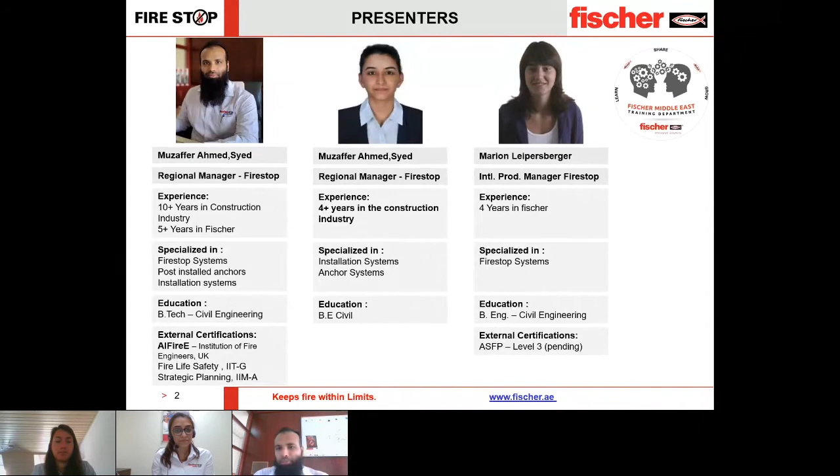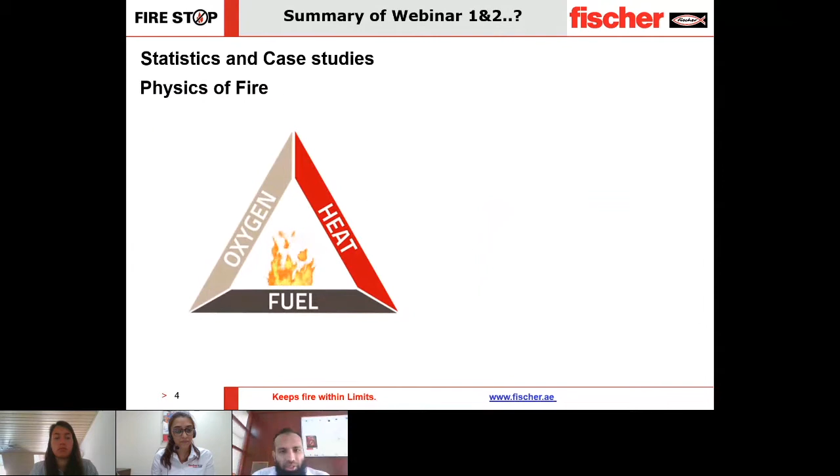Just to recap, in the first installment of this Firestop series, we had discussed some case studies concluding the importance of taking a balanced approach to fire protection, which should include the active as well as passive fire systems. And to understand better, we saw how fire behaves and understood the different stages of fire progression. Then we saw Firestop as part of the requirement within the passive fire protection systems and the code requirements of the same.

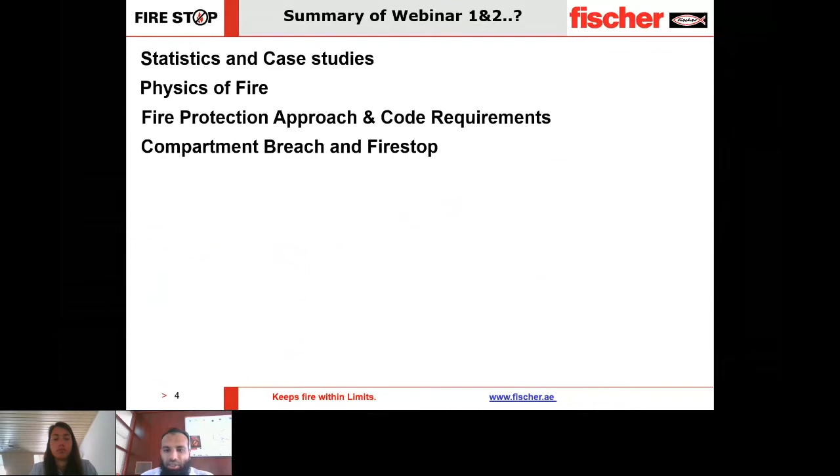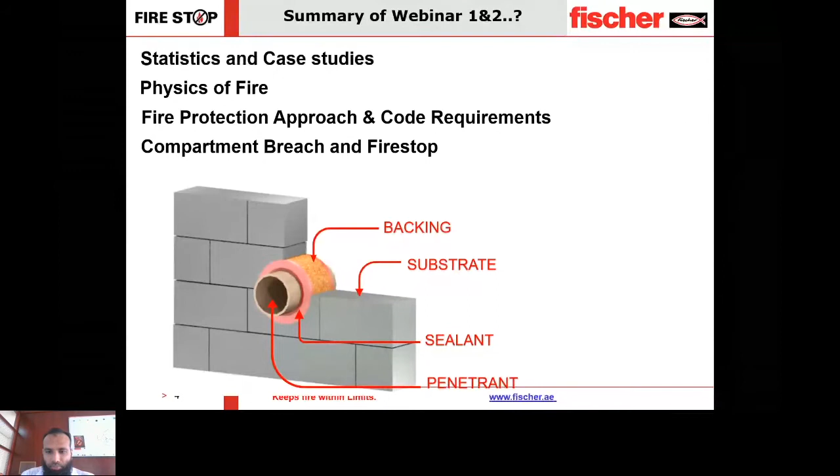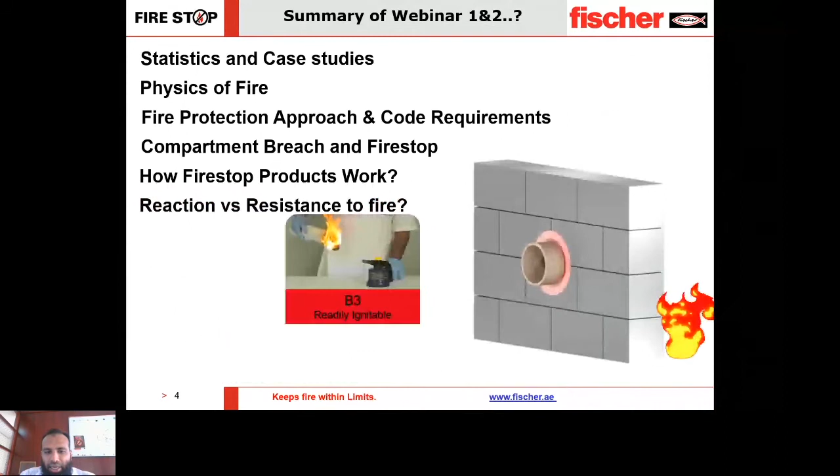In the second episode, we talked about the system approach for fire stopping, where all the elements of the system are to be considered while looking for a proper solution. We also discussed the different technologies behind the Firestop products, and finally, the standards for testing and certification were discussed in detail, including the EJ, or engineering judgment, discussions that we had.

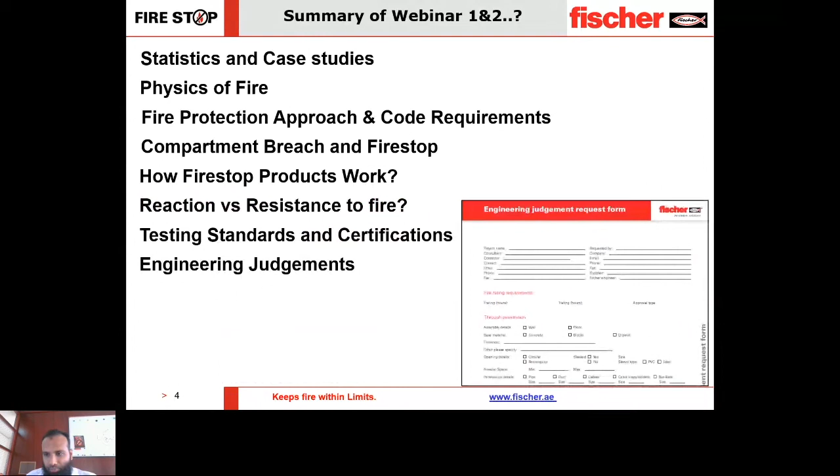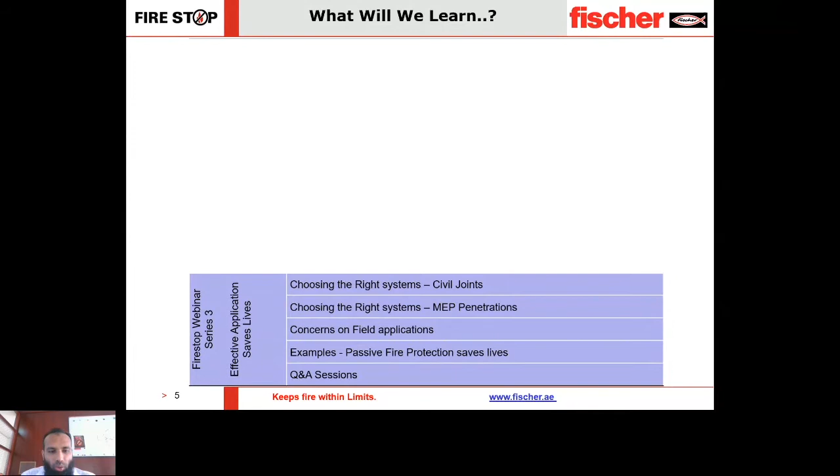Let us continue with this presentation today, which is the final in our series, and we will be looking into the right systems or the solutions that we as fischer would offer in the civil joints as well as MEP penetrations. Then we would discuss some concerns regarding applications, and finally we would wrap up the session by showing some examples of how passive fire protection worked, and a question and answer session will be at the end.

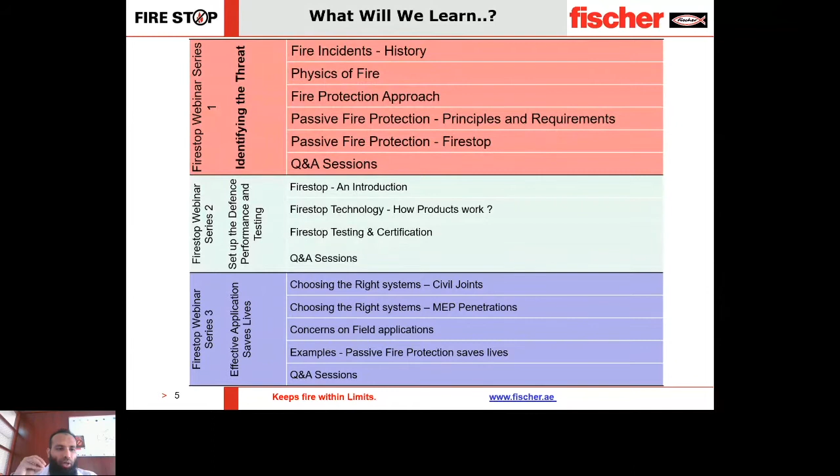So that we had covered the entire range and tried to do justice by giving as much information as possible for Firestop. In the last episode, we had shown that we have a range of products which are divided into 4 main categories: the sealants, sprays and coatings, wraps and collars, and some special products.

Now, many times people would have this question: why are there so many different products, and why can't there be one product as a solution for entire fire stopping in a project? Now, we have seen that there are several types of breaches that are caused in a fire rated barrier. Each of these breaches has its own different set of parameters. So you have different types of penetrants that are going through, and hence to address all of these solutions, all of these fire stopping requirements, we would need a range of solutions which would be addressing individual applications.

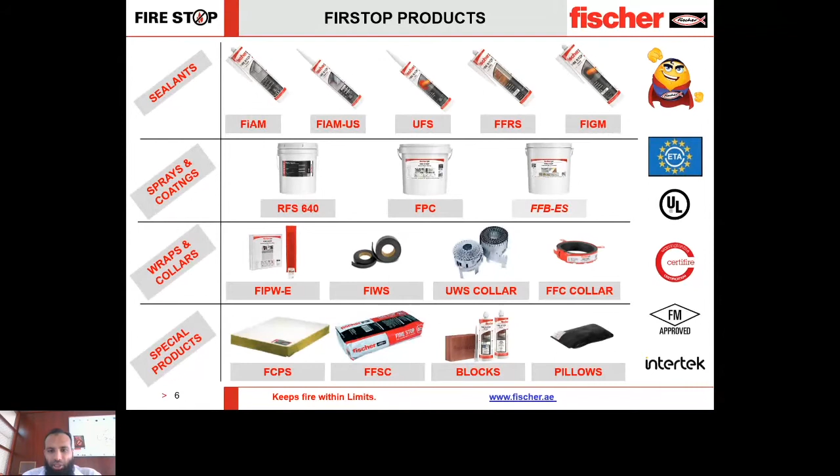So we would look at the applications that we face in day-to-day fire stopping, and we have divided that for simple understanding into civil joints as well as MEP services. When we talk about civil joints, we are talking about the joints between fire-rated members, fire-rated barriers, or sometimes, as in case of curtain wall, a fire-rated barrier and a non-fire-rated facade system.

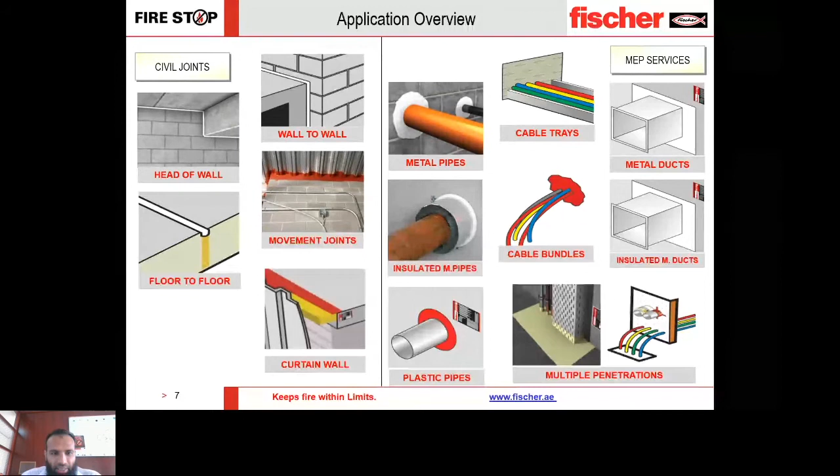And when we talk about MEP services, we are talking about all the different types of penetrations that would be going through. And to discuss about civil joints, I would like to invite Ansel. Ansel, can you take us forward in our quest for finding the right solutions for fire stopping in civil applications?

Sure. Thank you, Muzaffar. So coming to the first application that we generally come across in the field would be the head of wall joint. So this is a joint between a fire rated wall as well as a fire rated floor. Now we need to consider a few parameters while choosing the right system for it.

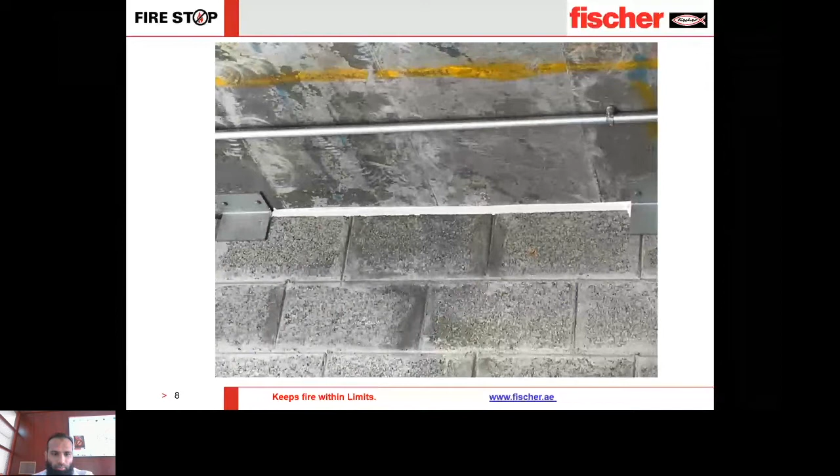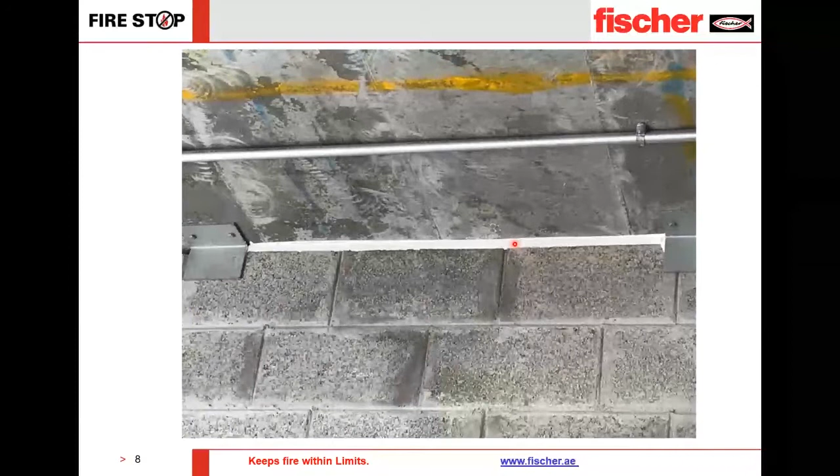So the conditions would be the aesthetics, like is your joint exposed? So you will need a material that would be compliant with the painting requirements as well, and also meeting the color requirements as per the architectural plan. Similarly, you would also need to take care that there will be some structural movement within this joint system, so it needs to be capable of withstanding the movement, and mostly you need to take care of the aesthetics or the acoustics of the joint.

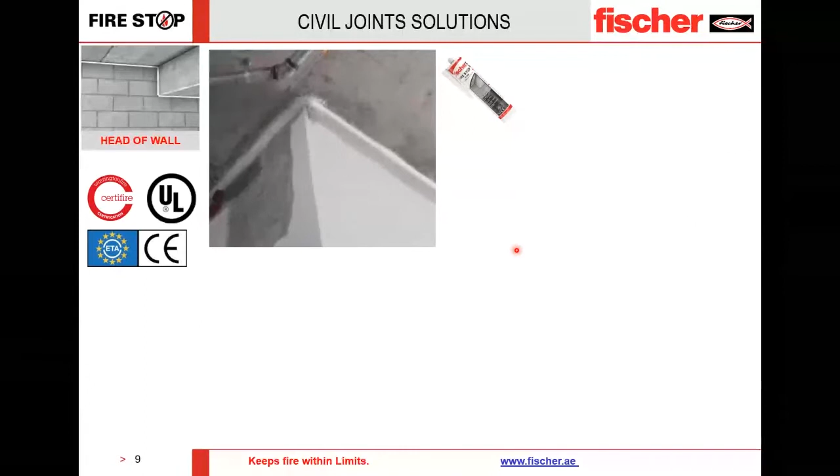The most common solution we would propose would be our acrylic-based sealant called FIAM, fischer Intumescent Acoustic Mastic. The name itself says that it takes care of the acoustics and it's an intumescent material. As it is an acrylic-based material, you can paint over it, and it is available in white.

You can apply the sealant with a thickness of 10 mm over a PE backing rod, or with a thickness of 5 mm over a stone wool backing. Apart from this, the movement is tested for up to 25%, and that would be enough for a normal head of wall joint. Similarly, we have another solution called the rapid fire seal, or the RFS 640, which is red in color.

This would be suitable for areas which are having a false ceiling. It has quite a movement capability of up to 50%, and this would be applied like a spray.

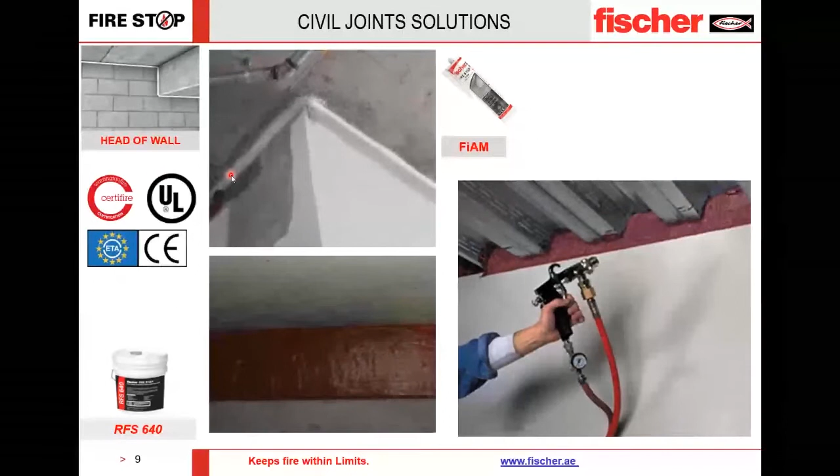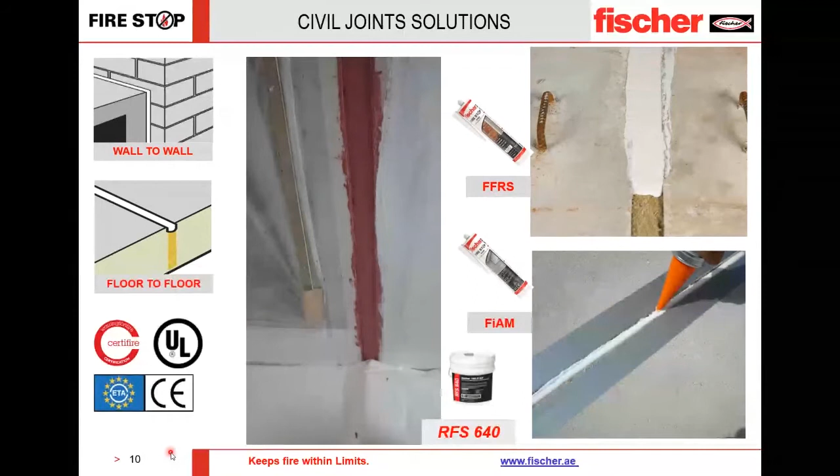Building occupants will not be able to escape very easily. Also, it is known that apart from flames, smoke and toxic gases are the most hazardous of all. So the joint must be properly sealed.

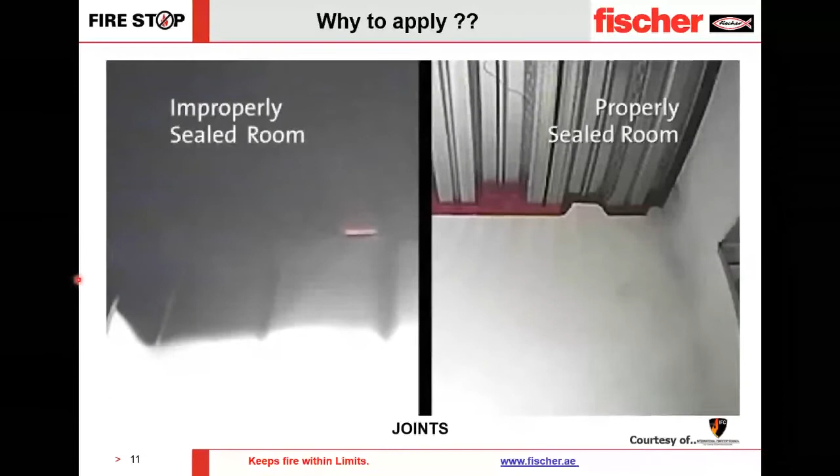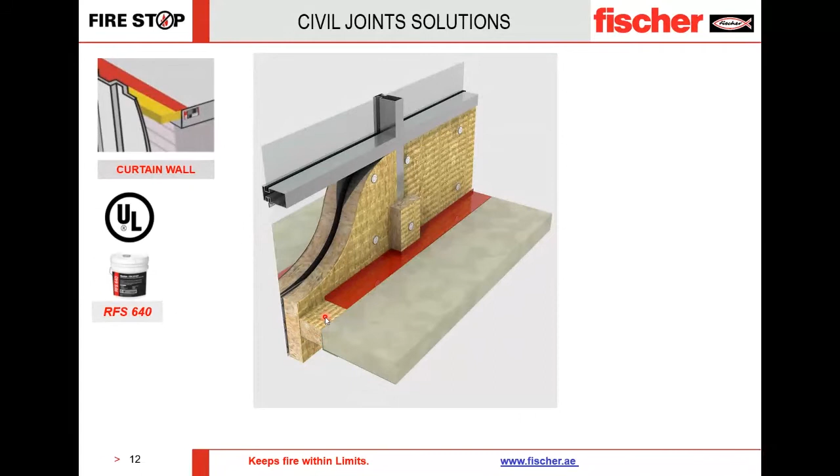Coming to curtain wall application, the main criteria here is the joint which is formed between a fire and a non-fire rated facade system would be approximately up to 200 mm. The solution that we would provide in this area or the gap should have sufficient insulation so that the glass does not break in a fire incident, and then close the gap in an event of flame.

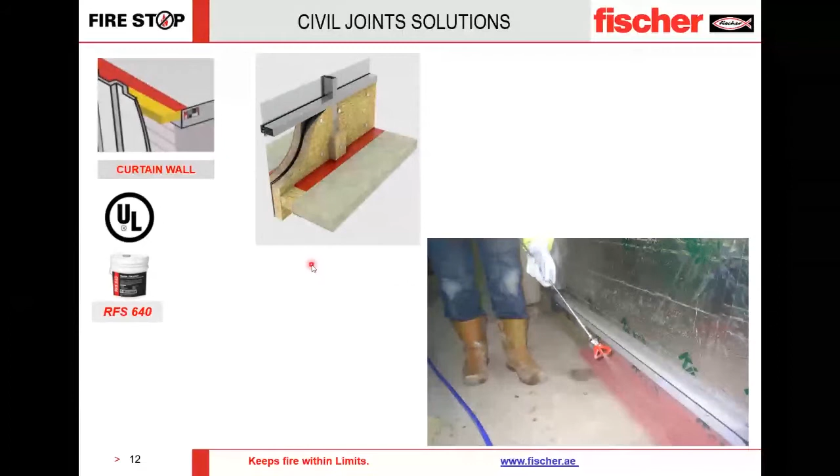The proposed product would be the RFS 640 in this case, where there is a mineral wool backing and then a spray sealant over it. The thickness of the sealing required to reach a fire rating of 2 hours is 1.6 mm thick. When it dries, it would reduce the thickness to 0.6 mm, and this is capable of taking a movement of 5%.

You can also use another product, which is the FFB-ES, but the thickness is slightly more than 2 mm. We also have a dry type of system where you can compress the material, fix it using the brackets, and that's all. This material would be predominantly used even for glass facades as well as ventilated facades.

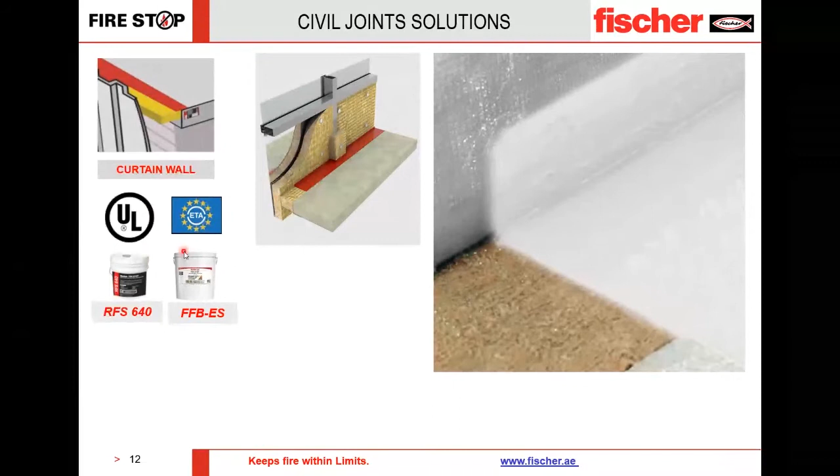This brings us to our second category, that would be the rain screen facades or the cavity or ventilated facades.

Now, rain screen system would be constructed with either a stone material or an aluminum composite panel sheet. Also, quite often we see that ACP sheets are used, and these sheets provide an easy path for flames to pass and spread across the external facade.

Now, these ventilated gaps are a requirement to have for a functional purpose. However, during the fire, this does not behave in a positive manner. So we need some product that would provide the ventilation during the lifespan of the building. When exposed to the event of a fire, it closes the gap.

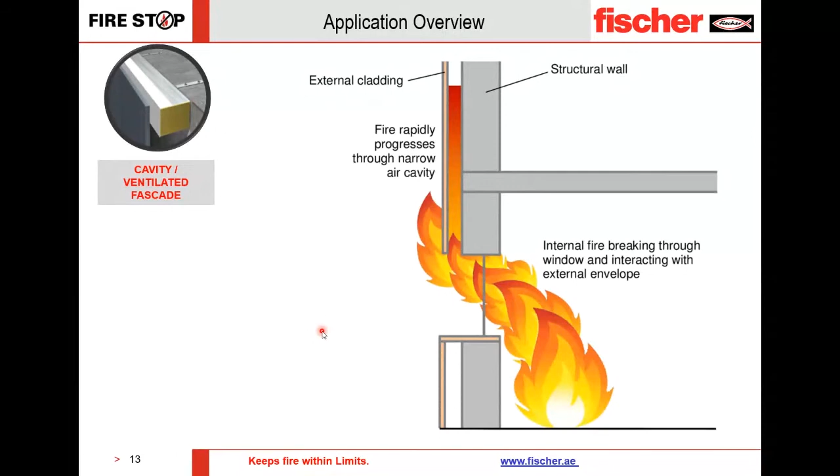So we have a product called the Ventistop, which has an intumescent strip which would allow the ventilated gap of 25 mm, and then when exposed to a fire, it expands and closes the gap behind the facade itself. We have an additional product, that is the FCFCL, which is placed vertically.

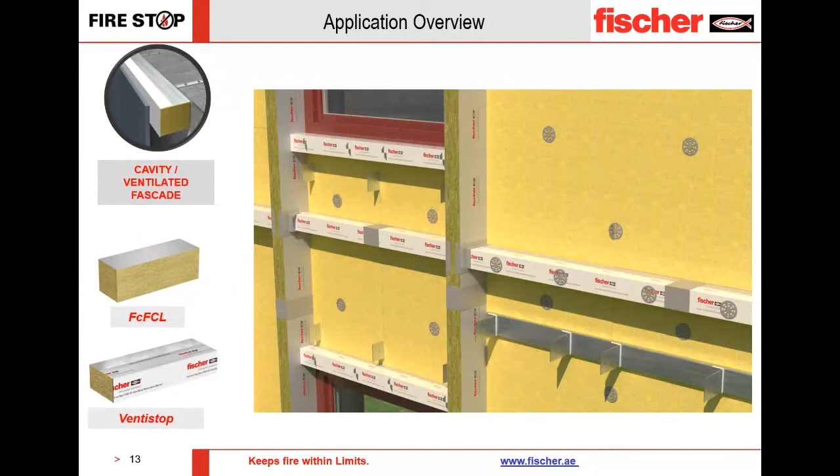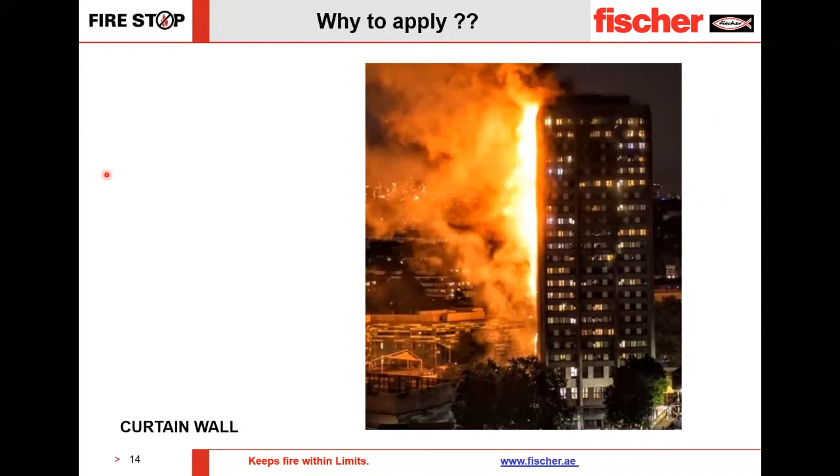Civil joint applications are really, really important. It is very important to note that civil joints are continuous joints, and a proper solution there would ensure safety of the building occupants. Now, moving on from civil joints, we come to MEP services.

In MEP services, we have several penetrations. The first common penetration that we look at are the pipes. And within the pipes class, we have the metallic pipes. So, Marion, can you take us forward in the metallic pipe solutions? What kind of metal pipes do we see on the usual projects?

Sure, Mustafa. Thank you very much for the introduction. So first of all, for fire stopping MEP services, we always need to take a close look on what exact type of penetrations are going through an opening in a floor or wall. So for metallic pipes, on the construction site, you will find a huge variety, but metallic pipes are mainly made out of steel or copper.

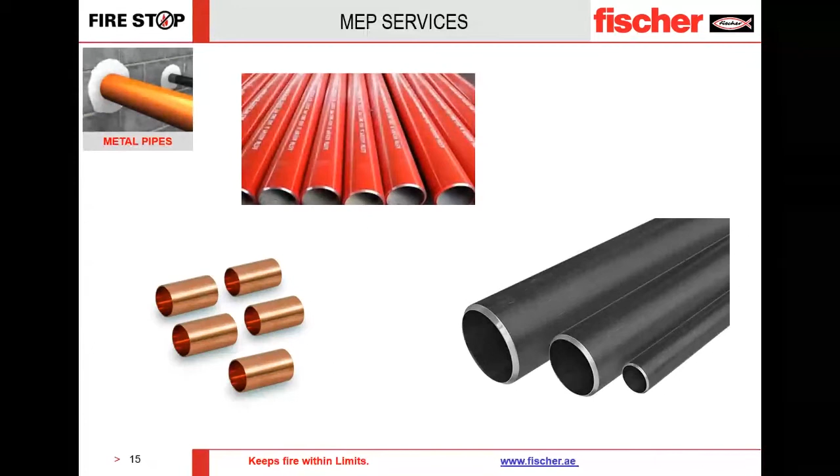For metallic pipes, Fischer can offer a variety of sealants with different approvals. The two most popular ones that we can offer are the Fischer EMUS and the Fischer RFS Rapid Fire Seal. Both of them are tested to the UL testing standards and have multiple UL listed systems. The application for metallic pipes is usually very simple, as the advantage of a metallic pipe is that in a fire they stay integral and will not decompose. Because of that, we only need to close down the gap between the pipe and the opening, and the application is finished.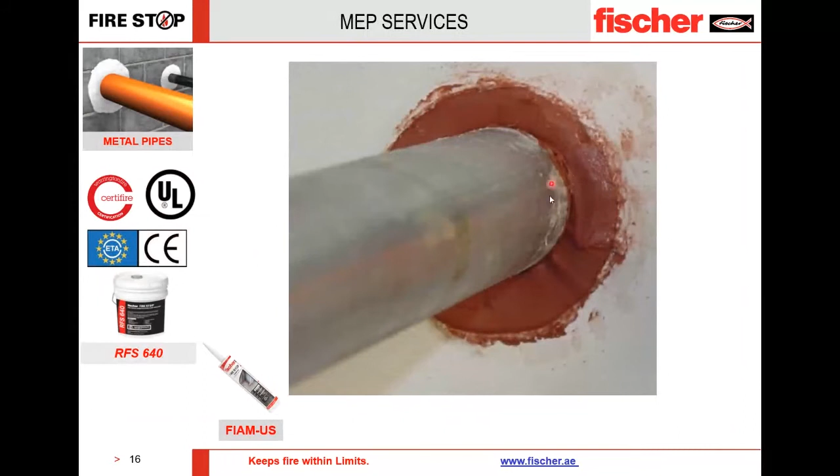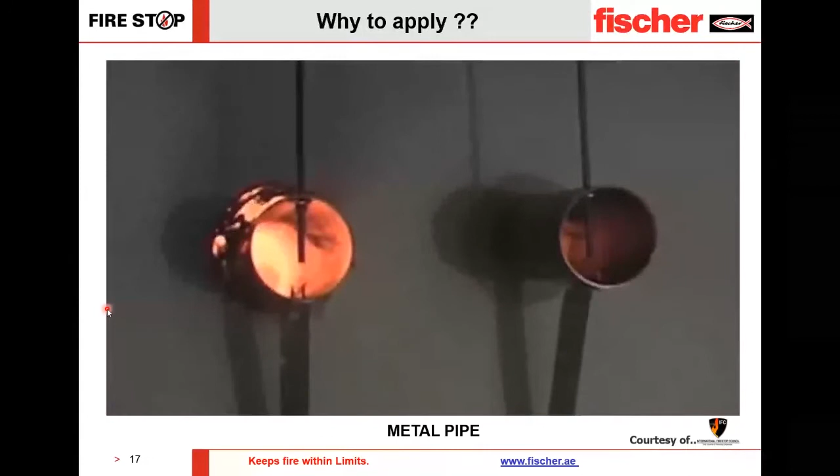We prepared also here a short video which shows the impact a proper Firestop sealant is doing around a metallic pipe compared to just using the standard foam which you often find on construction sites. And from the video, you can imagine on the left pipe, which is not sealed properly, how quickly the heat, flames, and the fire itself will spread from one part of the building to another, especially in comparison to the proper fire protection done on the right pipe.

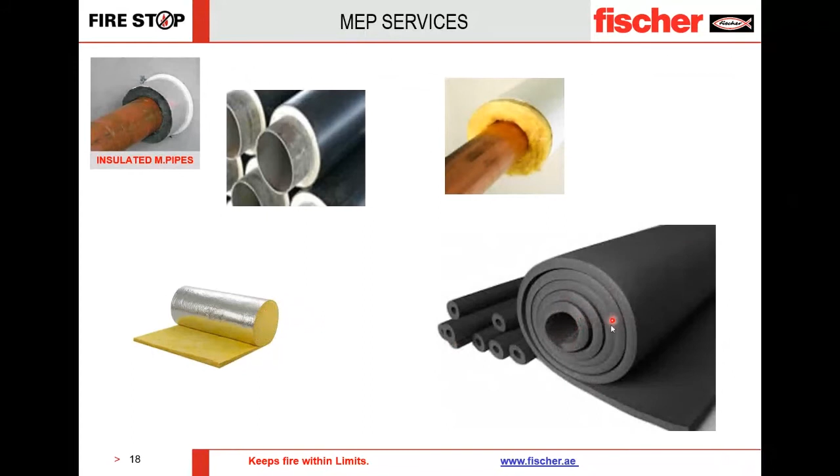Now let's move on to another type of pipe we often find on construction sites, which are the insulated pipes. The choice of the right product here strongly depends on the insulation material which is used. Mainly, we can differentiate between three types of insulation: stone wool, glass wool, or a rubber type insulation, as seen on the right bottom, for example like the Armaflex insulation.

As an example, if a pipe is insulated with stone wool, this actually helps us under fire conditions, as stone wool insulates the pipe and stays integral throughout the fire, making it way more difficult for the heat to transfer through a wall or floor. On the other hand, if you have a rubber insulation, it will melt very quickly in a fire, leaving a bigger opening for the fire and flames to pass through. In this case, we need to use a different type of sealant.

So the Fischer solutions for insulated pipes are, for example, the FIAM-US, which can be used perfectly around stone wool insulation, or the UFS, the Universal Fire Stopping Sealant. For the rubber insulation, we can offer a very good special sealant, the FIGM, the Fischer Intumescent Graphite Mastic. It has a UL-EU approval, and the graphite contained in the sealant makes it expand very big when it is exposed to heat.

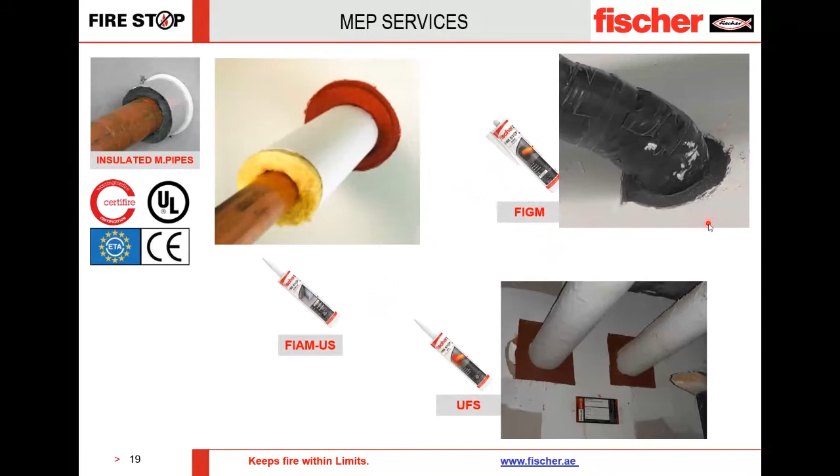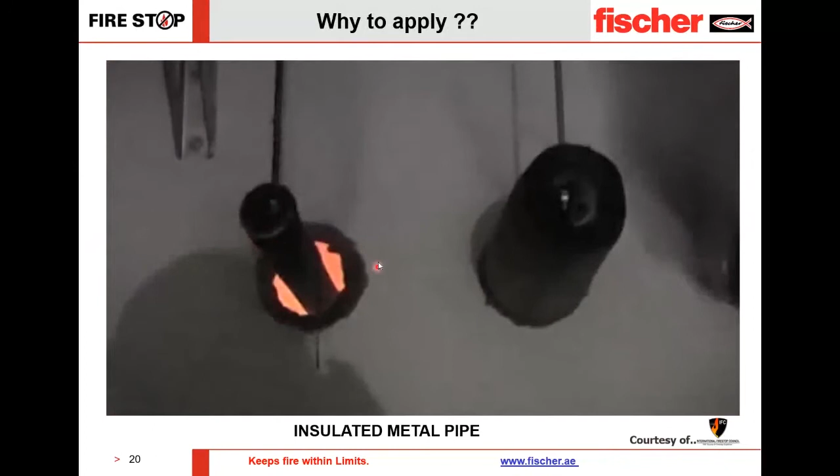On the next slide, there is again a video which shows on the left pipe the use of a B1 foam, which you usually find on construction sites, and on the right side a proper fire stopping, which could be, for example, the FIGM solution. What is important to mention here is that the insulation is completely the same, and you can see that on the left pipe the insulation is completely melted away. There's a huge gap where fire can pass through, and the sealant used on the left pipe is not doing any good to keep the fire away.

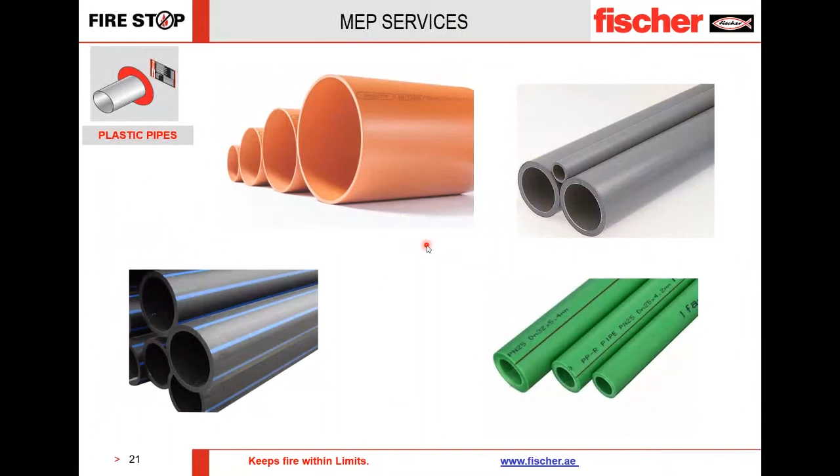The last type of pipe I want to present to you are the plastic pipes, which we also very often find in buildings, and they can be made out of, for example, PVC, PP, or PE. So what is the difficulty with plastic pipes? In the event of a fire, the pipes will burn or melt away, so we need to use a product which is able to fill and close this resulting opening.

For plastic pipes, Fischer can offer 3 different types of products: first, a variety of sealants. If the pipe diameter is not that big, we could use the UFS and the FIAM-US, just in comparison to the insulated pipes. If the pipe diameter is a little bit bigger, or we have a different type of pipe, we can also use the FIGM with the UL/EU approval.

On the other hand, we can also offer wrap strips or fire collars, which in the end basically all do the same thing. It just depends on the customer's needs whether they want a visible or an invisible fire stop solution.

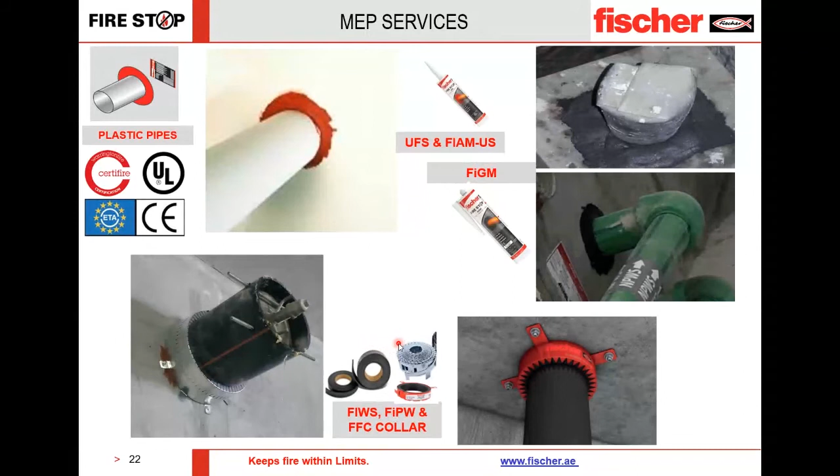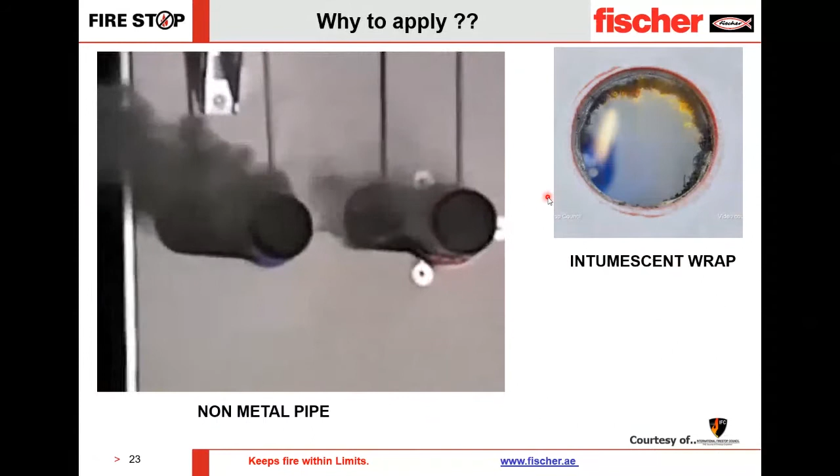So the next video shows the significant difference between a proper and an improper fire stop solution. The pipe on the right has been fire stopped correctly using a fire collar, as you can see in the video. The other pipe was just sealed using a standard sealant. And yeah, I mean, you can see it pretty easily.

There's fire and smoke coming through. The opening is completely open. The pipe is completely melted away. There's nothing left of it.

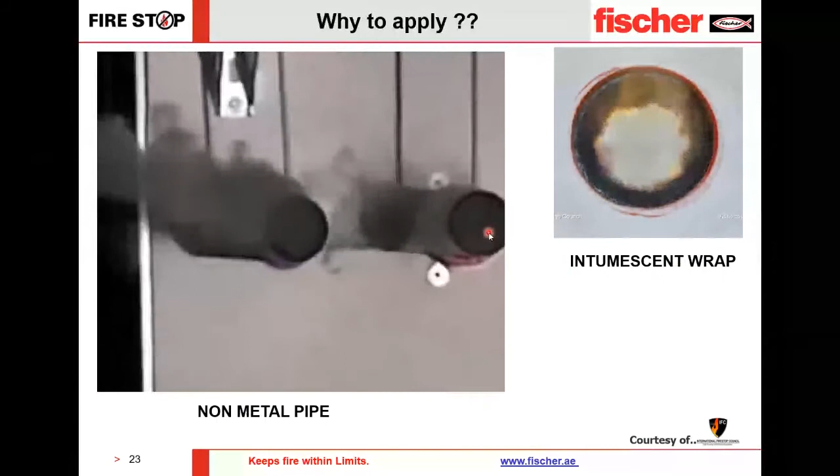On the other hand, when we use the fire collar, there's just a little bit of smoke coming out of the opening, but the pipe still stays the way it is.

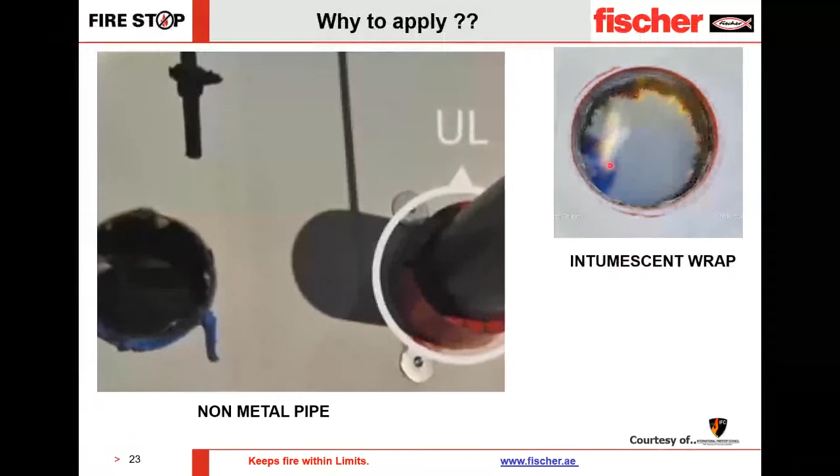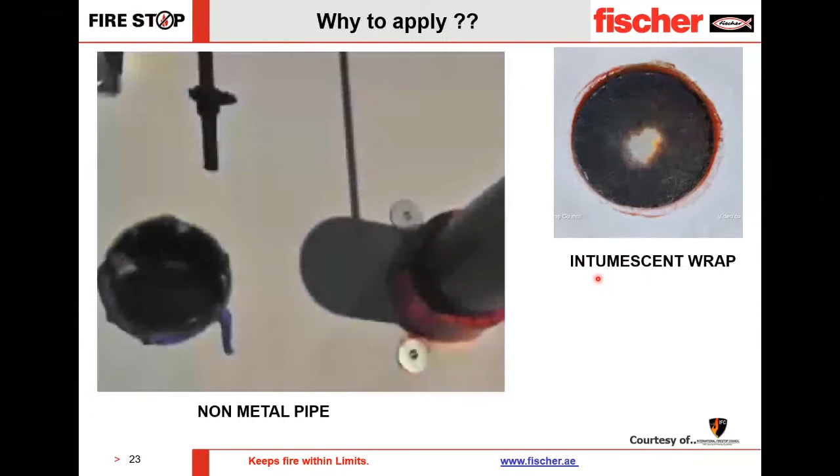The video on the right shows how a wrap strip works. The strip contains this graphite material, which expands a lot when exposed to heat, which then crushes the slowly melting pipe and completely closes down the opening.

All right, so far for the pipes. But in a building, we not only need pipes, for example, for the water supply, we of course also want to have electricity. So now let's take a look at the electrical applications.

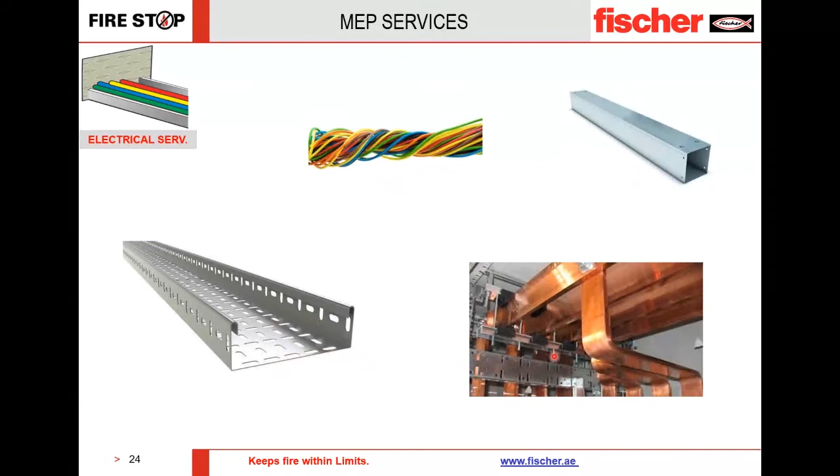In a building, we find a lot of single or bunched cables, cable trays or trunkings, or even busways. I quickly would like to show you how we can cope with these different electrical applications, starting with the cable bundles.

Cables are mostly structured with metallic lines on the inside and a plastic jacketing on the outside, so the product we use for fire stopping these cables needs to be able to cope with both types of materials. Perfect for these situations, again, are our two sealants, FIAM-US and UFS.

For cable applications, we can also offer a special kind of product, the Fischer FBS foam barrier system, which has a UL/US and a UL/EU approval. This system comes in Firestop blocks and a Firestop foam, and it's perfectly used if it's necessary during the lifetime of a building to add additional cables, as these can just be pushed through the application, and it's still an approved solution.

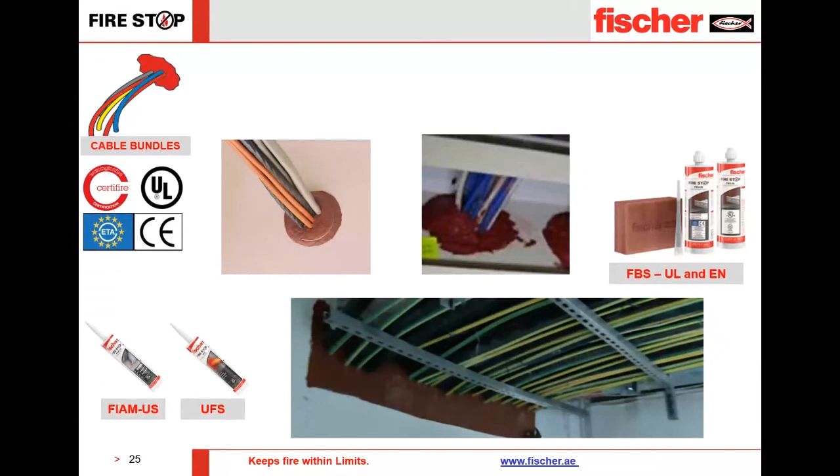For cable trays, on the next slide, we have a little bit different products, as mostly the openings for cable trays are a little bit bigger, since the cable trays are bigger, and there's also more cables running through the opening.

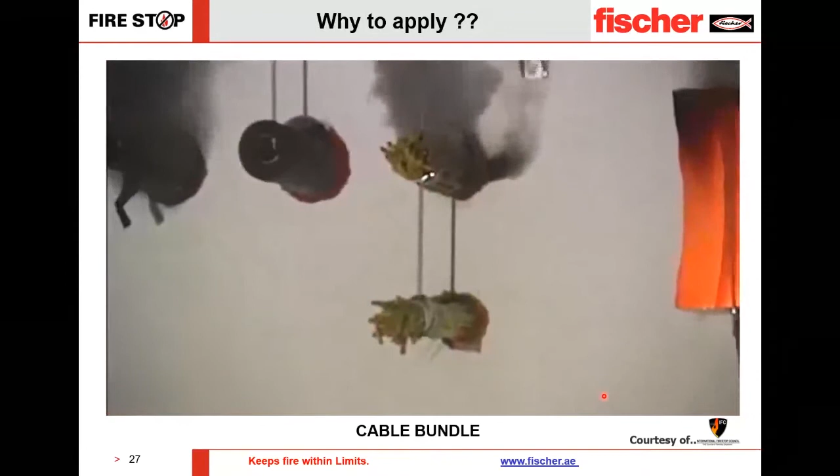Again, we have prepared a video which shows on top cables which have not been firestopped correctly. You can see the jacketing of the cable melts away, and there's a lot of smoke coming out of the opening. On the bottom, firestopping has been done correctly using a sealant which has been tested to the according standard, and there's almost no smoke coming through, so the passage of fire, smoke, flames, and heat is prevented very well.

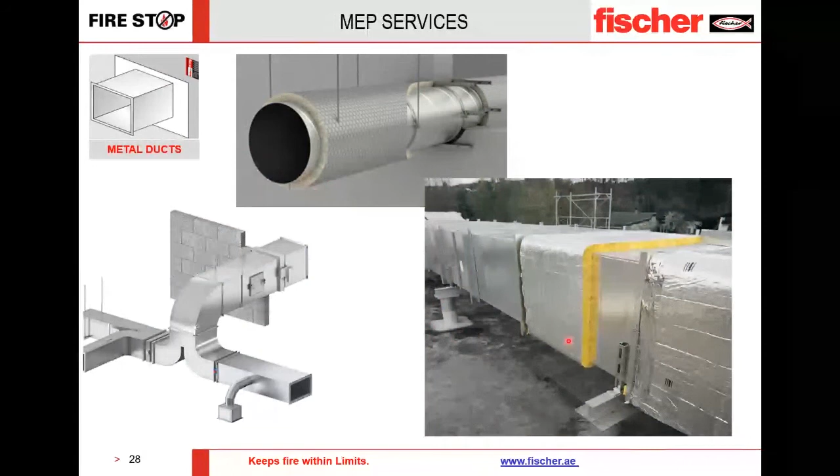Another type of penetrant we regularly find in buildings are metallic ducts for air conditioning or heating purposes. They sometimes have insulation, or are just metallic. Depending on the type of duct and the size of the opening, we can use the sealants UFS or FIAM-US to close down the gap between the duct and the wall or floor. In some cases, if the duct is insulated with a rubber type insulation, we need a solution which is able to close down the gap of the melting insulation. In this case, we can use the Fischer FIGM, the graphite mastic, which expands a little bit more.

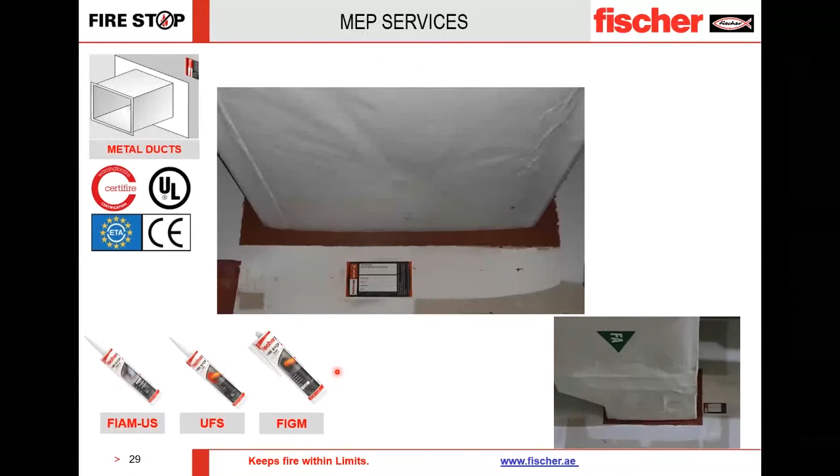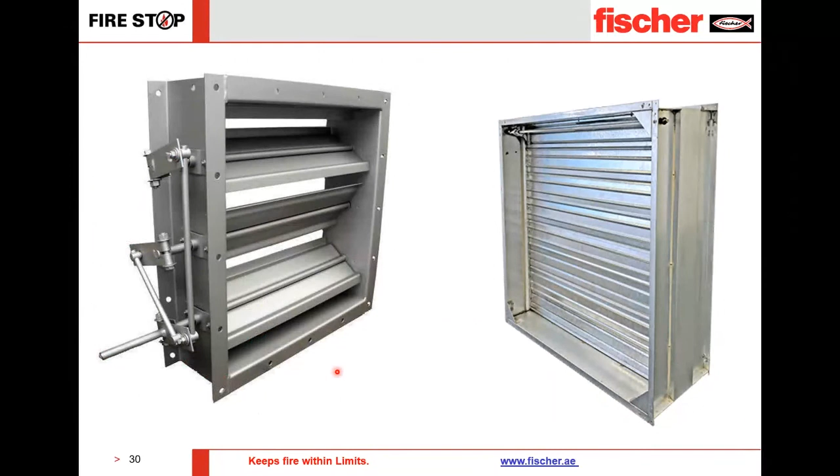On the next slide, you will find pictures of what we also sometimes find in buildings, which are fire dampers, installed in the floor or wall. Fire dampers allow air to pass through under normal conditions, but will close down in a fire to prevent the passage of smoke. Here we usually only have a small gap in the wall or floor between the duct and the substrate, and we can use, for example, a sealant like our FiAM, the intumescent acoustic mastic, as a smoke seal.

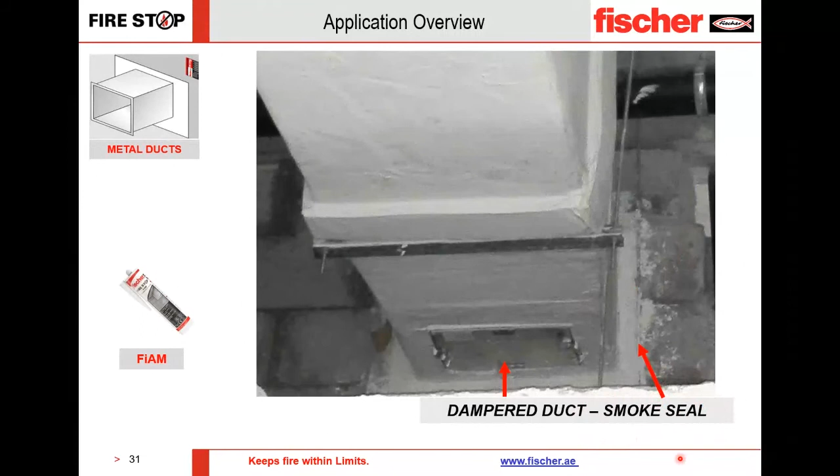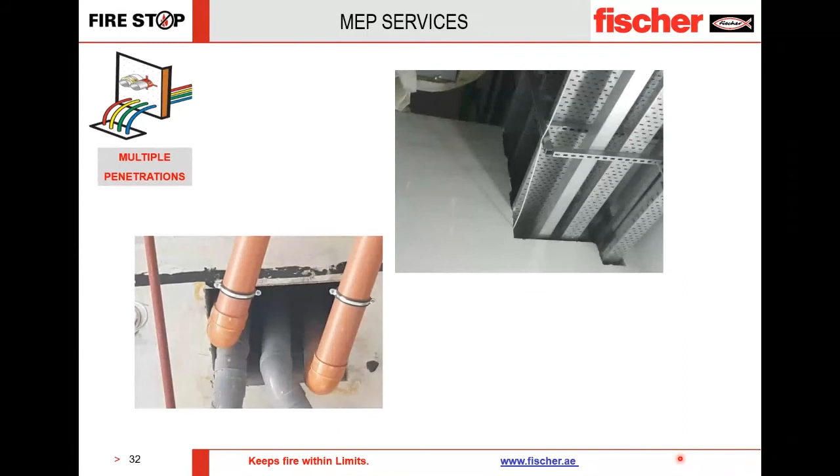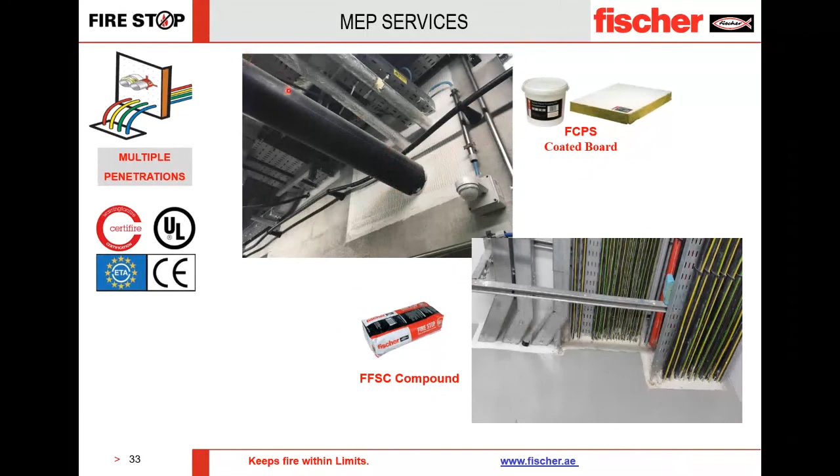For the last type of applications, we have multiple penetrations. In most cases on a construction site, we don't have only one type of penetrant going through an opening, but one huge opening where a lot of different types of pipes, cables, and cable trays are going through a wall or a floor. For this, fischer can offer mainly two solutions: first, the FCPS, the coated panel system, or the FFSC compound solution, which can also be used around different penetrants. So here we use the system FCPS or FFSC to close down the opening, and then we will firestop each penetrant individually depending on what type of penetrant is going through the floor or wall.

So that was it for the MEP services and all the fischer solutions that we can offer for that. Mustafa, I'm handing back to you.

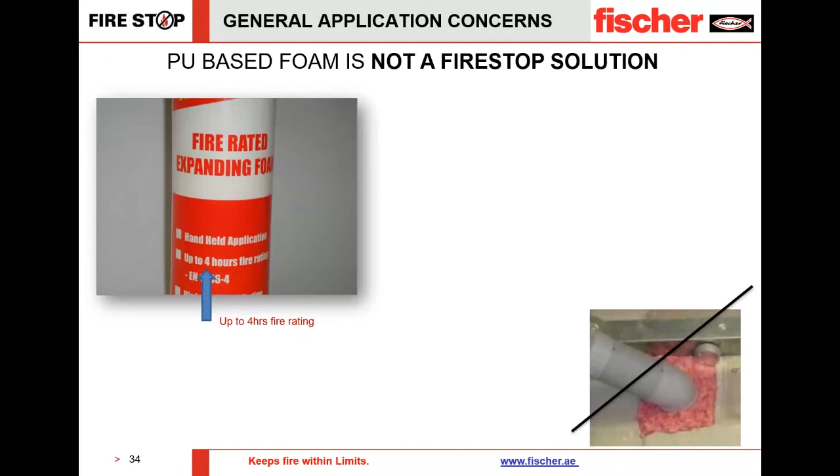We talk about Firestop foam. Basically, it is a product approved for certain applications, specifically for joints, and it does not have any application for head of wall or for MEP services. Even when we talk about civil joints, if your joint width is up to 10mm, you can use the Firestop foam up to the complete rating required. But the moment the joint width increases, the rating falls drastically, where at a 50mm joint width, the rating falls down to just 11 minutes. So we have to be careful about what product we propose and where we use it.

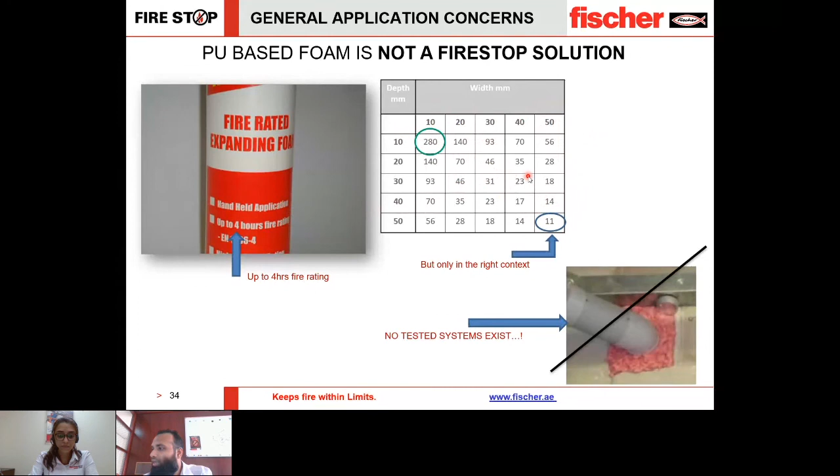The second thing we commonly see on project sites is where people have made an opening bigger than required, and then try to close it down using just cement mortar. Cement mortar, as you know, is a very bad product. When it tries to cure, it reduces in overall size, and generates a lot of cracks within itself. Cracks are not good for fire, and spread of smoke happens very easily. Especially during a fire incident, the cracks develop further, resulting in a huge propagation of smoke. So the right solution here, as discussed by Marion, is the Firestop compound used correctly to reduce the opening size, and then individual firestopping as discussed, in the shape of an engineering judgment that we provide.

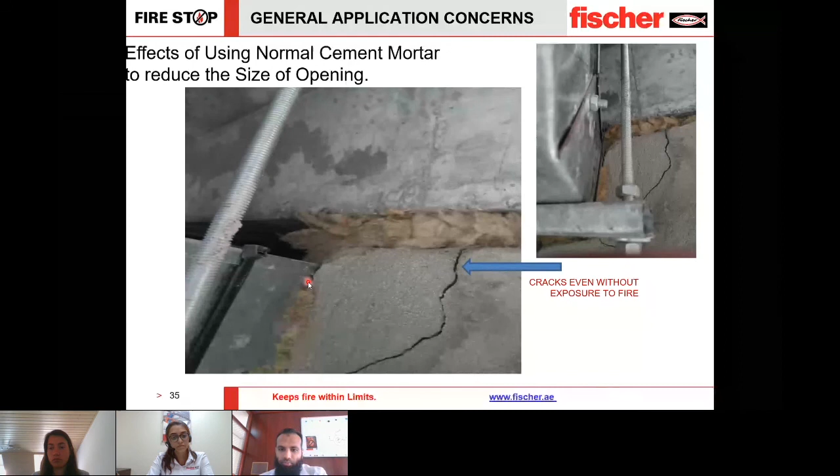Let me clarify one more point here. These sealants, being intumescent, are absolutely fine if they have some surface cracks on their body. However, because of the aesthetic and appearance, it would not be a good idea to increase the thickness beyond the recommended thickness.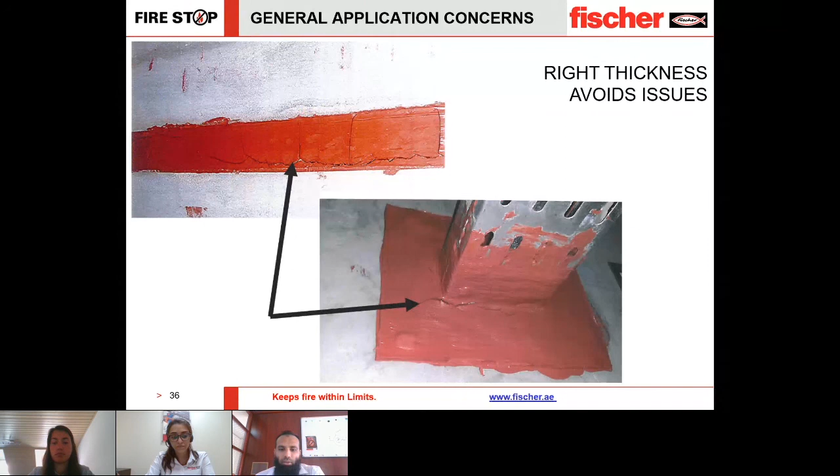Finally, it is very important to do proper tooling and finishing of the sealant. When you apply the sealant, you have to clean the substrate, then do proper finishing and tooling to ensure there are no air bubbles within the sealant. The air bubble, when it tries to escape, generates this kind of air bubble appearance on the sealant body itself. The problem is the sealant thickness at these locations will be lesser than required, and because of that, it might end up having a weak point where fire can break through this barrier.

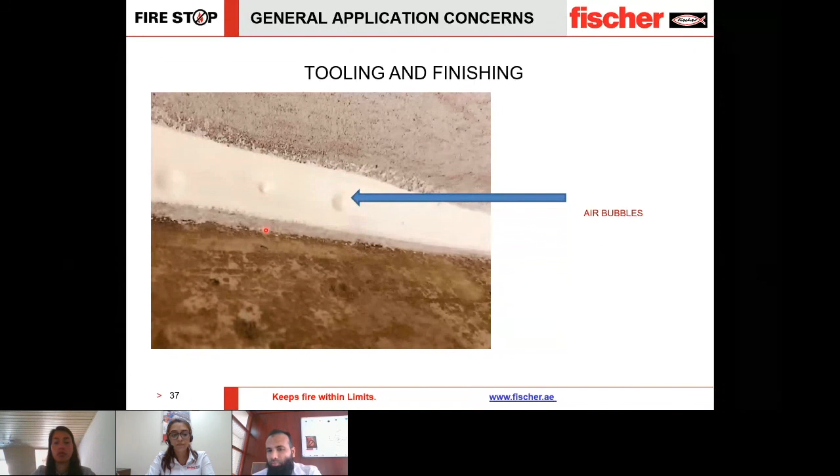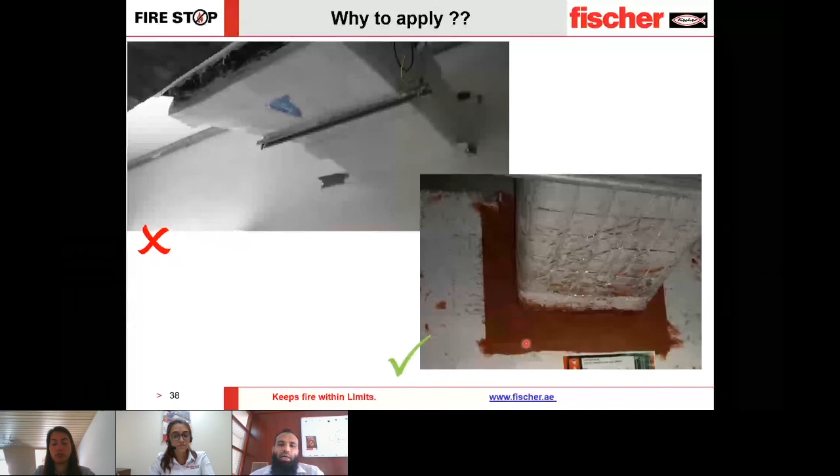Moving ahead, when we talk about ducts as a solution, we always need to remember there has to be a retaining angle. If there is no retaining angle, then it is not completely complying with the tested system, and we need to see if the duct size is within a small size, or if there are certain tested systems without a retaining angle, then of course we can provide a solution. But the basic thumb rule is the bigger the duct size, the more you need a kind of restraining element or retaining angle, to ensure the duct stays in place in case of a fire, and the sealant and backing material can behave and prevent the passage of smoke and flame that we want to prevent.

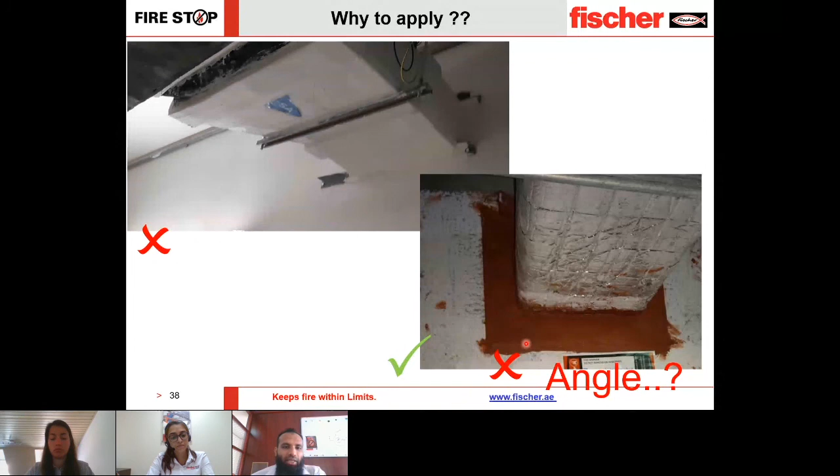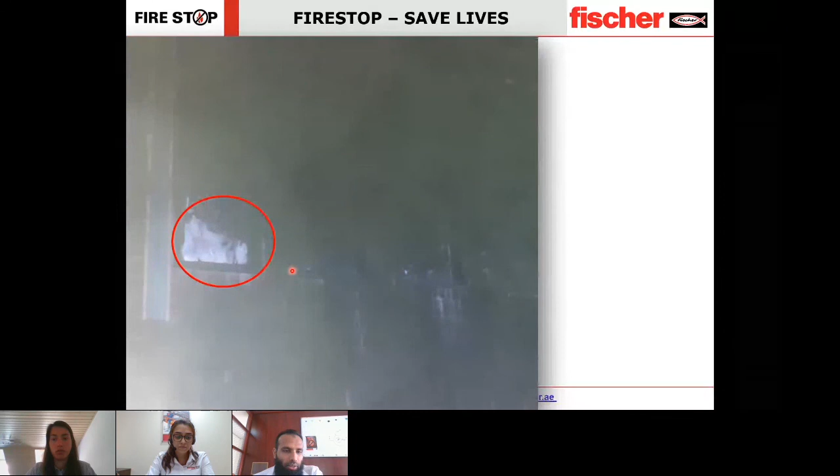Similarly, in this image, this is the fire side of a fire incident in a warehouse. What you see here is a small window, and the other side of the window is an office. You can see that the fire which happened in the warehouse didn't affect the office space because proper fire stopping was done in the fire rated barrier itself, preventing the passage of flame and smoke through that fire resistant barrier.

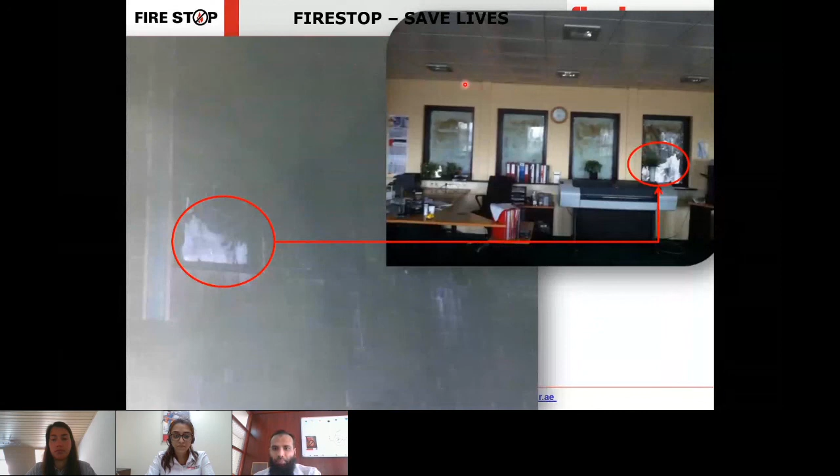But let us open the forum for question and answers, and let me go through the questions tab to have a look at the questions that have been posted today.